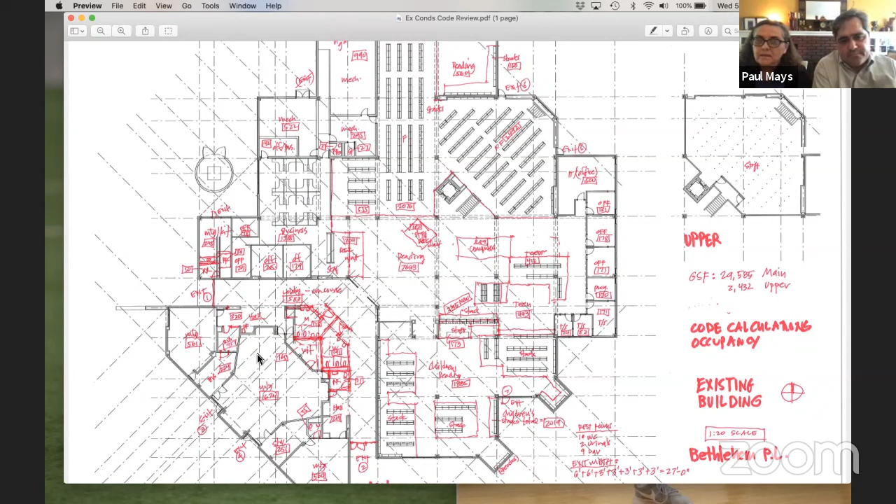So you could take that room and figure out what 25% or 50% is. Here's the thing I should say though, the code is not based on any reality whatsoever. Really putting 109 people in there is not at all what you would think.

So you might have something posted in that room now. It's 90. Which sounds more realistic to me. At 109, you'd be nose to nose with just about everybody.

But I also wanted to say that some code officials say you're a library, so under the occupancy classification, there are 2 library sort of rules to follow. One is if you have a stack area and one is if you have a reading area. So if you take your entire building, call it a library, and only use those 2 numbers.

If you only use that, you come up with a much lower number. So this sheet that we just did here, this red sheet, allows you to have 537 people in your building by code. But if you do this alternate method by using gross square footage for stacks and net square footage for reading spaces, you actually get 459 people in your building.

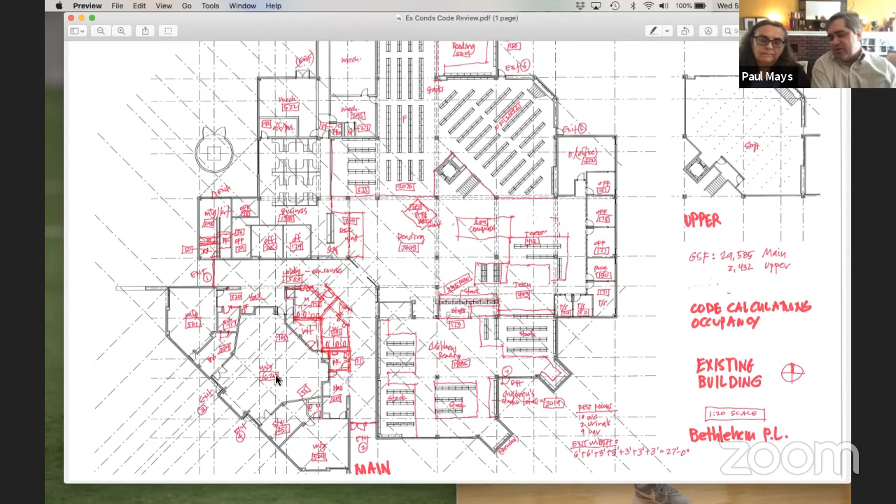So the spreadsheet, you can all have a copy of it and you can look at it. You can see how we calculated everything. The big ticket items are any room that has an occupancy over 49 has to have 2 means of egress. So I've highlighted that, and you have 2 means of egress in each of those areas anyway.

So you're good. For reference, Jeff, that's BPL code occupancy.pdf if you want to pull that up. That's a spreadsheet that Lisa was just talking about, and that'll give you those occupancy numbers.

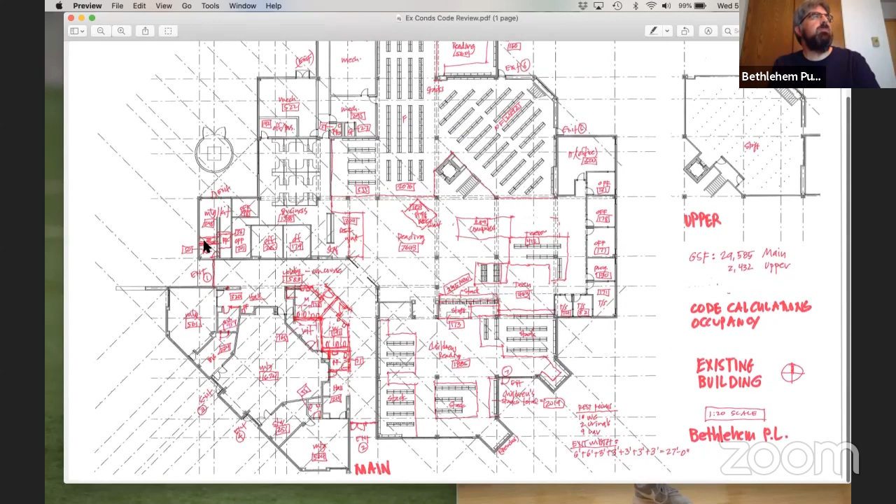Okay, that also totals up and gets you your net square footage and your gross square footage at the end, just in case you wanted to know.

As we're doing this, this obviously becomes part of the master plan because it's an analysis of the building. But for the staff, as you're looking at planning for partial reopening or occupancy, feel free to call us if you need to clarify something or want us to run numbers based on changing something around. This is the existing building and the analysis, so you can use that right off the bat.

What happens in my spreadsheet is it automatically goes to the next spreadsheet, the plumbing fixtures, and does the calculations for me. That's critical for you to know too — you're required to have 3 male water closets and 5 female, and you have a total of 12 now. So you really only need 8 by code, and you have 12, so you're good.

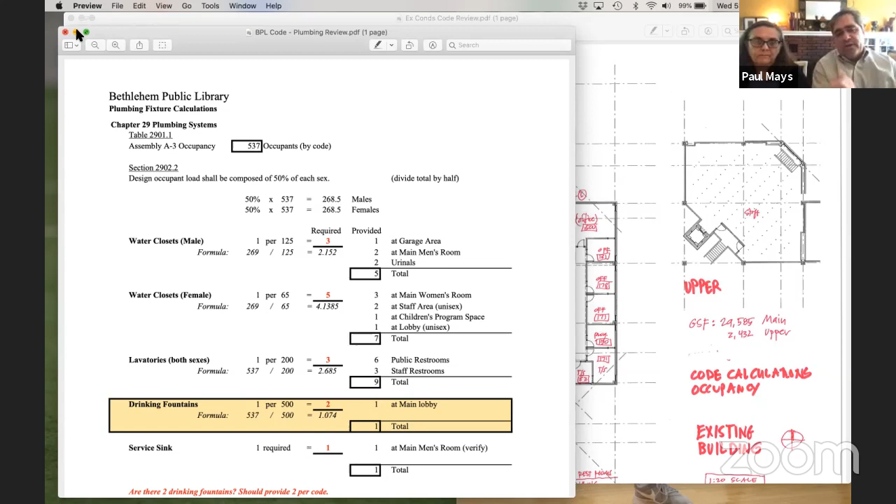Plumbing is generally not a very exciting thing to be thinking about, but in terms of the master plan, that's an area where we often find ourselves having to say you have to add a restroom or a lavatory, whatever it may be. And they think, we've been in this building all this time — it doesn't matter, it's about meeting code compliance. But you're actually in good shape there, and as Lisa said, we have standard spreadsheets in our office that carry that calculation right through.

So that one is actually the BPL code plumbing review, which was one of the documents that just got sent as well, Jeff.

Got it. Question on that. So the 459 or the 537 number would be total human occupants of the building, right — both employees and patrons? Correct.

Do we have a sense of what our typical or real-world max capacity is for the building? We're saying 459 is the realistic one, but code allows 537. Sure, but even 459 would be every space at a reasonable approximation of maximum capacity, right? I guess what I'm wondering is, do we ever get 300 people in the building today in the normal course of business?

Well, normally when I do this, I have a floor plan with existing conditions, and I've written down where all the chairs are so I can count them up — that's the practical use. But all your chairs were in a pile when I went through, so I took some best guesses from photographs, and I thought I'm not going to even put those in the spreadsheet yet.

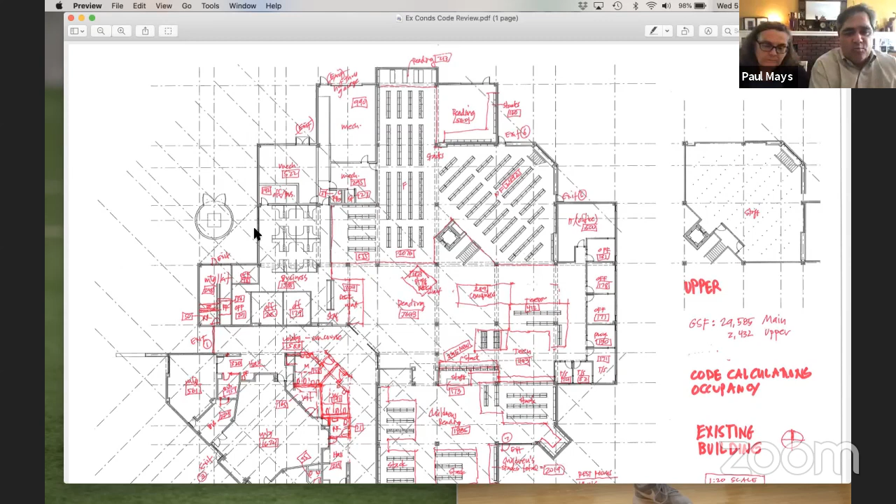But Jeff, you probably have a sense if you have a door counter or anything else of what the occupancy is, average over the day. I don't want to speculate off the top of my head, but I think that's a number that is knowable — we'll try to back our way into that. And obviously, defining what a normal or typical day is right now is up in the air as well.

But this is good background information, and it's particularly pertinent now given the current scenario.

I also did the code calculation for your upper mezzanine as well, just so we would know what the net and gross square footage of the entire building is, not just the main floor footprint. I did have it — I put it in the spreadsheet, so it's in those numbers. You could get 25 people on that upper floor, theoretically.

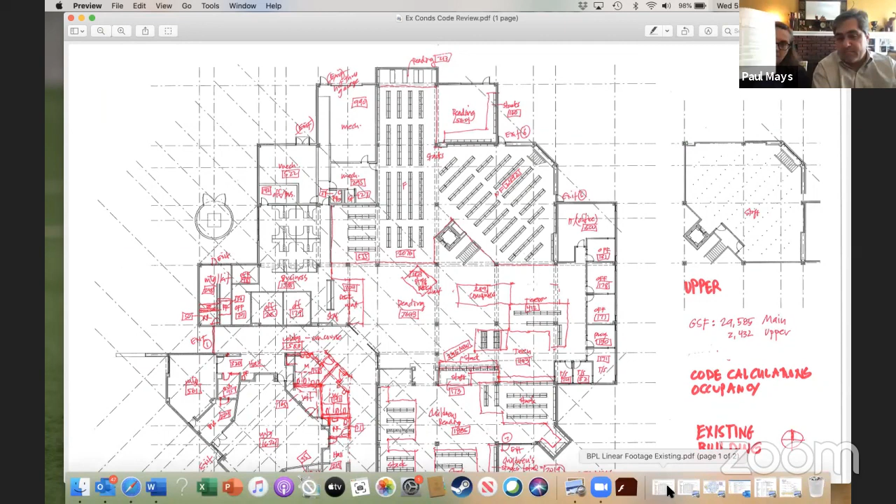And the other thing you asked, as long as we're looking at this existing conditions floor plan, is the lineal footage of all the stacks that you currently have. So there's another separate spreadsheet called BPL linear footage existing.

That gives all of your shelving by unit size and so forth. And we do another calculation because people always say, well, how many titles can you fit on a shelf? There's a range, so I'm showing a range. You could get 8 per linear foot or 12 per linear foot. I don't know exactly what your volume is. I could look that up on your annual report, but I do know now what your lineal footage is.

For everyone who's just listening in, you can imagine a James Patterson novel is 2.5 to 3 inches thick, whereas a children's picture book is a quarter of an inch thick. So trying to determine the number of titles per lineal foot is a guessing game unless you know the proportions of each piece of the collection, which are in your annual report.

So we typically go by lineal footage of shelving, broken down by genre, and then make sure that you have enough for what your collection is, with room for expansion. But we can get more detailed if you want to actually break it out and say, okay, now we want to do it at 8 per lineal foot, or 4 per lineal foot, or 16 per lineal foot.

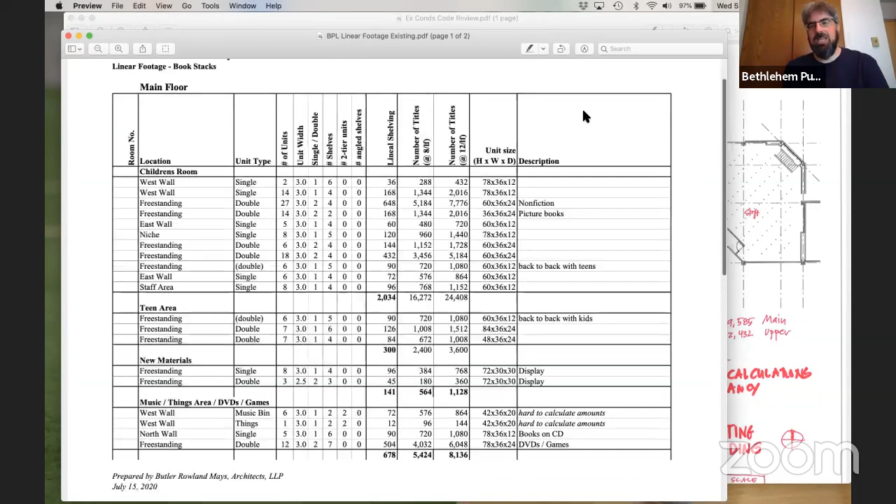Or we can look at things comparing section to like section, if we're comparing the existing conditions to a scheme. We look at the lineal footage of what exists, and we can compare that.

Yes, that's exactly what I meant in that first instance. We think of it as lineal footage, so let's compare apples to apples and go, here's the lineal foot in the adult nonfiction, here's what it is in this scheme. Then we can do an increase without trying to guess at how many titles per lineal foot we're talking about.

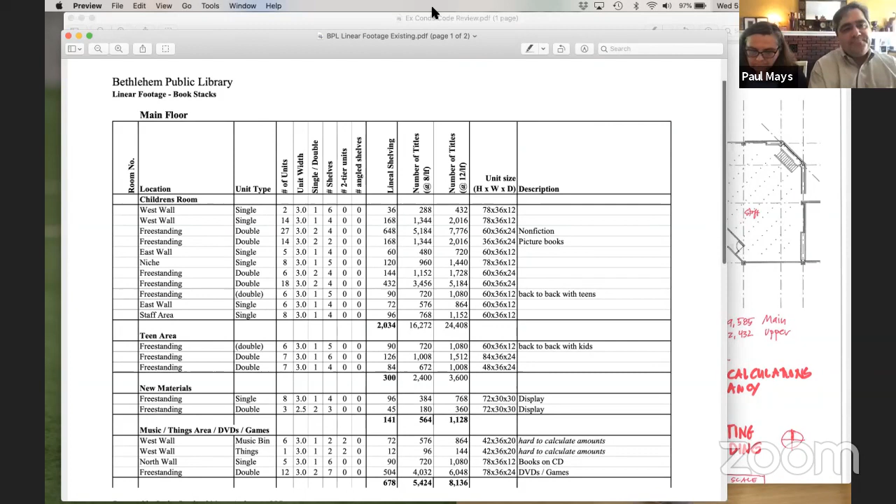So the next one then to bring up would be the new plan, the BPL floor plans new.

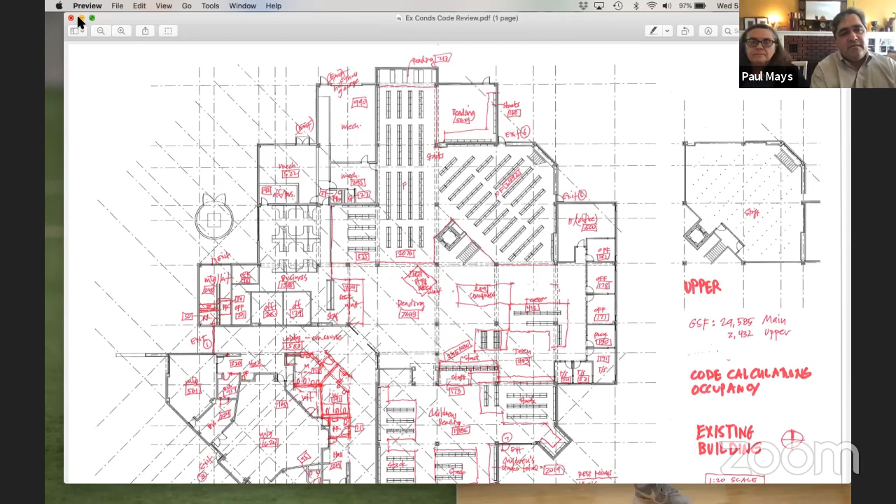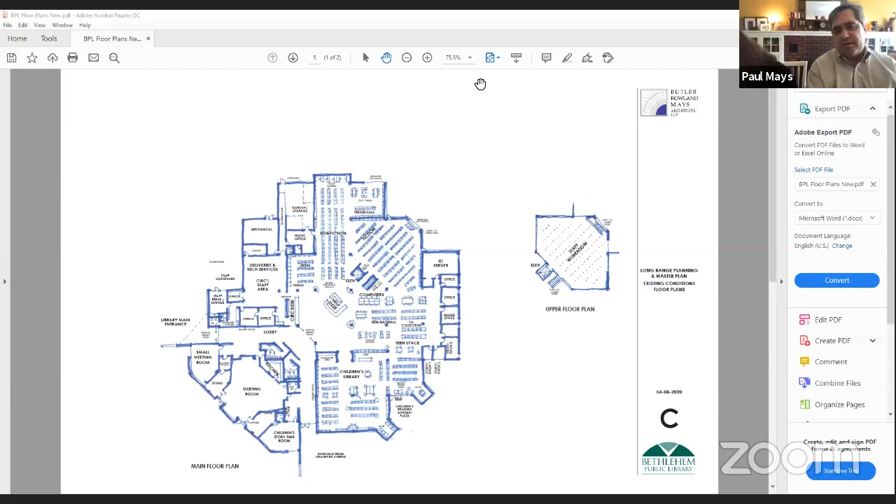You're sharing, right, Jeff? I can share, give me a second, let me see. I don't know if I can—I thought you were. Am I the one sharing? I thought you were. All right, give me a second, I'll share this one out. I got it. Does everybody else have it? Yep, got it. Can you share it so that we can... Hey Jeff, do you mind sharing, if we share it then we can move the cursor on it. Is that okay? Let me second. So did you—let me share. Okay, I'm unshared, you should be able to share.

There you go, did it come up? It did. Okay, so you've got a blue floor plan here with some yellow in certain spots and pink in another spot. Yep, yes, okay, good.

Okay, so this scheme started as the no-addition scheme. That's why I've highlighted the two areas in yellow, because you wouldn't have to do either one of them, but there are some concessions to be made, just in the way that I configured the no-addition scheme.

And so this starts to be kind of the first iteration of the hybrid, which is why I also put there could be a future addition over here at the end, because I know there was some consensus that getting the elevator and the stair out of the middle and putting them into an addition would be desirable.

But in this scheme, I felt it was important to address the entry, and we left the transformer the way it is. So this would be a minimal impact scheme, where you come in and then you immediately have a door to the library, rather than having to go all the way around the corner and down through your existing doors.

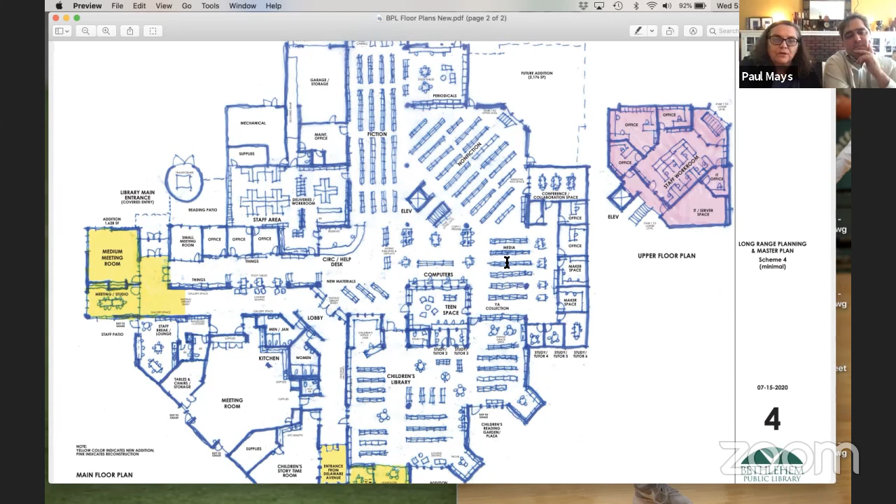Right here, media — it goes from the YA collection right into DVDs. By continuing the wall on here, we've added more shelving along here, and we figured we'd keep the games and other things close at hand, since they need a little bit more supervision. So that's what's happening right there.

To answer the question before it's asked, we're often being asked what to do about the current scenario for distancing, particularly staff safety and work areas, as well as public safety. There are two primary areas we're looking at. One is improvements to the HVAC and mechanical systems for filtration and air exchanges. Libraries already have a large requirement for fresh air intake compared to, say, office buildings or even schools.

So that's one component, but the other is the landscape furniture in work areas like this. What we're picturing is not just a divider that goes up a certain height, but one that also has an acrylic or glass piece above it that allows the light through, but isn't allowing direct contact with the face across workspaces if you're looking towards somebody.

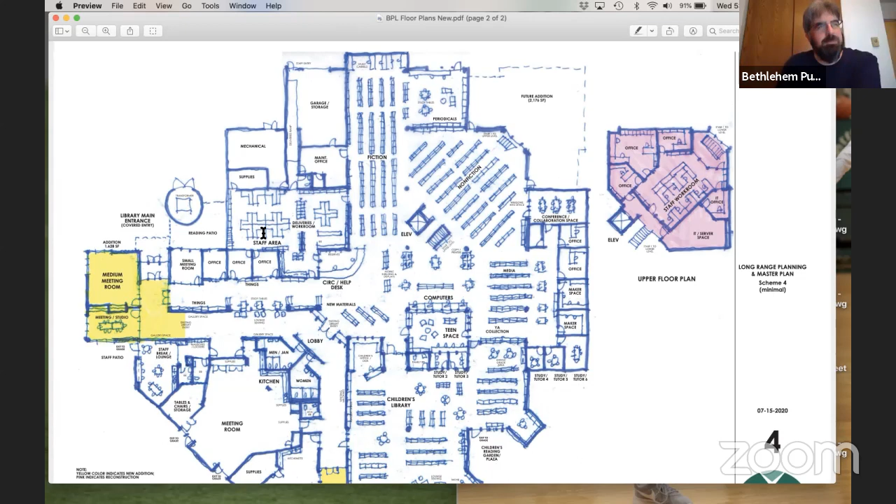The other thing I did though is I could quickly do the linear takeoff of collections for this scheme, and I sent that separately — that's the one you got just by itself. It gained 15% to the collection space in this scheme. I haven't looked at each individual area, so it might be more for one.

Teens was 300, now it's 576. So there are gains there.

So bottom line, as you look at the numbers to think about — what we've done in this particular scheme, even though it's the minimal intervention scheme, is get more meeting spaces of varying size, try to improve the flow, although we're going to keep looking at that, and add about 15% to the collection size. It accomplished all that with just those two small additions we're talking about in those areas, and by making better use of the upstairs, the mezzanine.

So as we look at the hybrid, I would expect those numbers to be higher — the increase not only in meeting space, but the increase in collection space.

It's really for the committee to start thinking about what kind of financial investment commitment there is, compared to the advancement of which priorities make sense. This might be enough for your community, or you might say this does what we want while leaving flexibility for future expansion, starting small and expanding later. Or you may want to go big with a single fundraising effort or referendum, and deal with smaller things later. So we'll talk about priorities and phasing next time we meet.

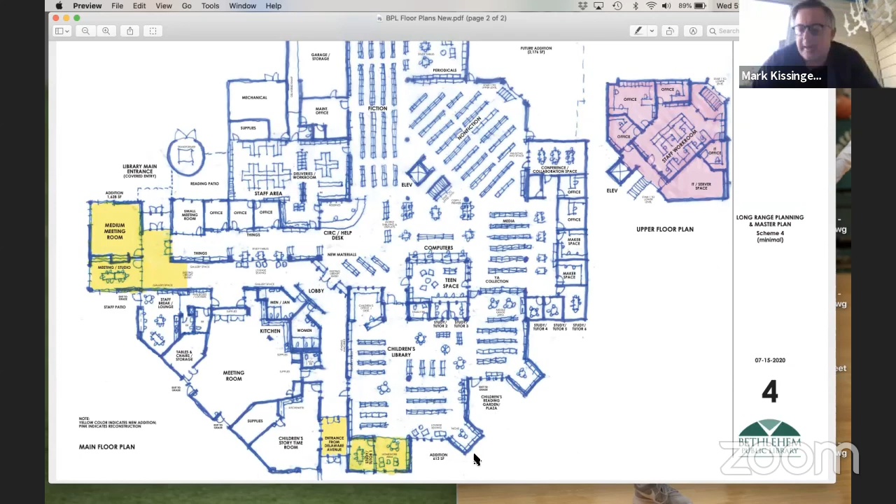Did you guys look at the zoning on Borthwick at all? Yes. So since that would be a frontage, we'd have to come back 50 feet, but the house isn't back 50 feet—the Borthwick house that exists now. It depends on a couple of options we've shown for that site, but I don't think our additions go out and encroach on that 50-foot line. We didn't think we got within 50 feet of Borthwick anyway; we were leaving a fair amount back.

In one of the schemes we were utilizing the parking area for your van, which was right out at the street, so I don't think it was 50 feet there. We'll look at it though, Mark. It's a good question, and it's one of the complications because with a corner lot you technically have two front yards. The good news is your side setbacks are only 8 feet, but you're right at that limit now—they essentially built out about where it would go.

The other thing we'll do, Harmeet, is go through that checklist you sent us with bullet points from a conversation with the committee. So in preparation for the next meeting, we'll go through and make sure we've addressed each of those pieces so we have a comprehensive answer for everything we've discussed. Okay, great, thank you.

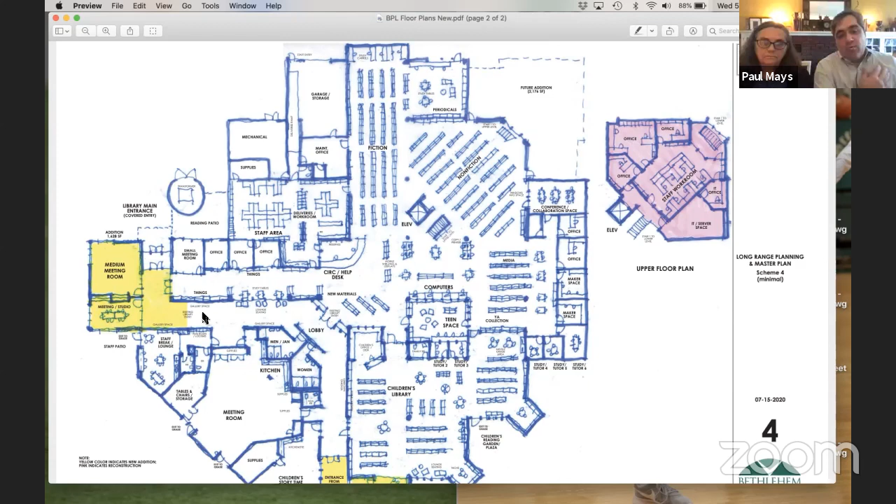I think this is an area we want to look at, Harmeet, because we have two parallel paths of travel. That's exactly what I was trying to work through—one made sense, and the other looks like it would be wasted if we didn't do something else with it. We don't want it to be redundant, but we do want to maintain access to the meeting room after hours while still having two means of egress. That's where it becomes a problem—if we blow this wall out and make it all one space, somewhere we have to create a transition from a public space to a behind-locked-doors space to allow after-hours usage.

But that's sort of what we'll be looking at as we go forward, making most efficient use of spaces. We're not creating corridors, but actual museum or display spaces. You've heard me talk about libraries being an opportunity to talk about the community, the history, and the context. That's a great place, as you enter the building, to get a feel for what Bethlehem and Delmar are as you're coming in.

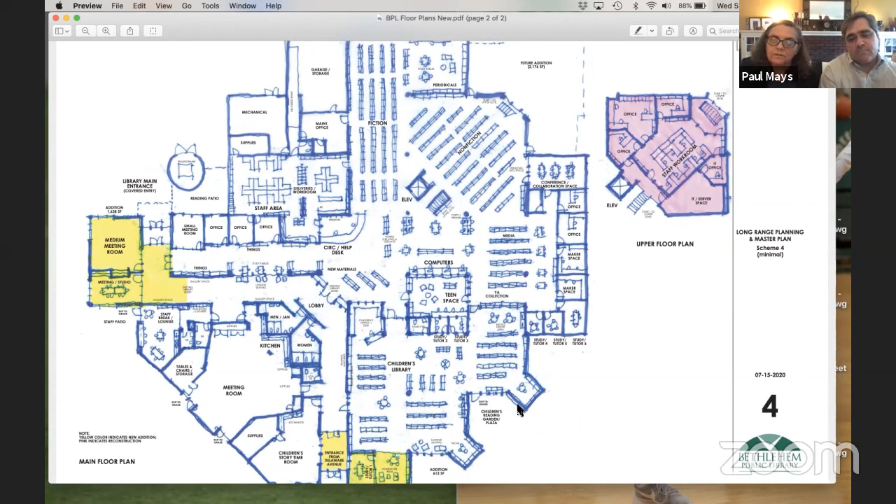One thing we haven't really shown yet, but every time I draw it I think about it, is we do these niches in a lot of our libraries so you can get off the beaten path and not feel like somebody's walking behind you. By doing this scheme here, we can almost do some niches that encroach upon that but still be part of the library space—so it's more like a main street.

Yeah, like bay windows out onto a street. That's why I was thinking you could do it along the kids' area too—that would be great, little window seats for kids or a little play structure inside. So there's a lot that could happen there to take over some of that space, still leave it a corridor, but make it a lot more vibrant.